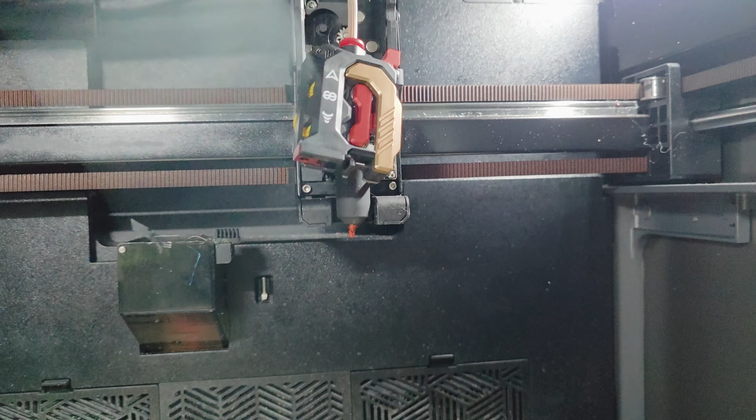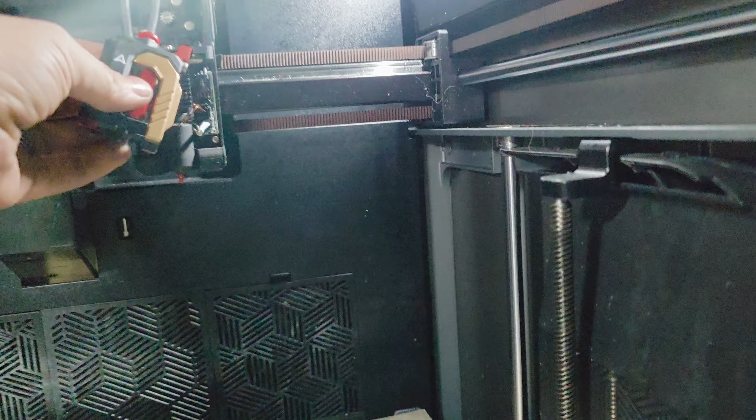We're talking about the DXC2 from Fatius Extruders today. I've had it for about 100 hours now, something like that. So we're going to talk about installation and the features and everything. So we can see here.

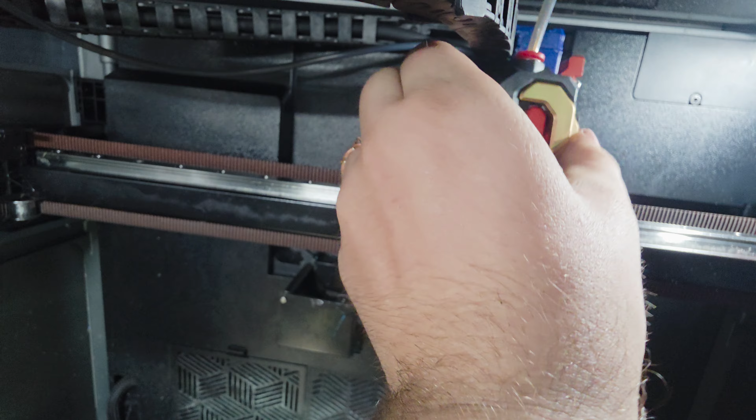So the first thing to notice is, yes, it is magnetic. It does just snap right into place and just clicks in. You can just pull it off just like that. That's the main feature of this.

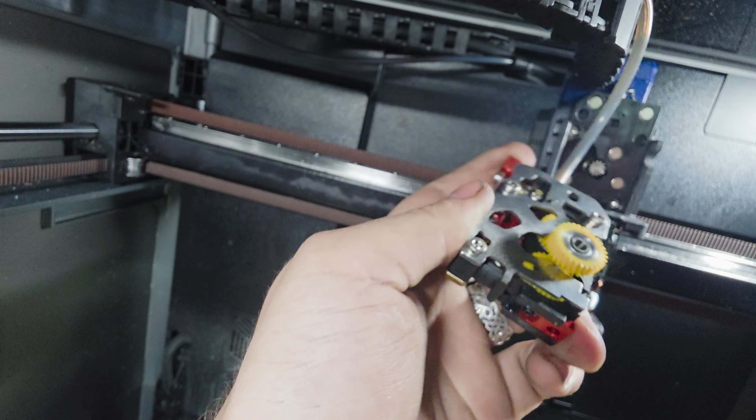It's a lot easier to clean clogs. You can see the filament path and the cutter and everything, and replace it. You don't have to spend 15 minutes taking apart the extruder. I know it doesn't take that long, but you know, to each their own.

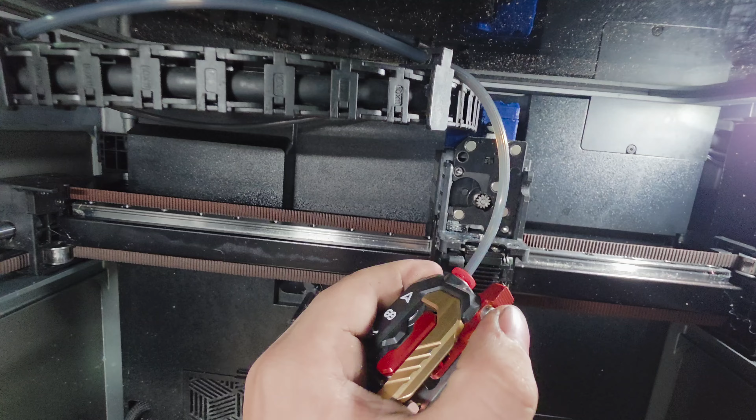One of the other main benefits is now you have an actual tensioning arm, and you can see here, you can see it move.

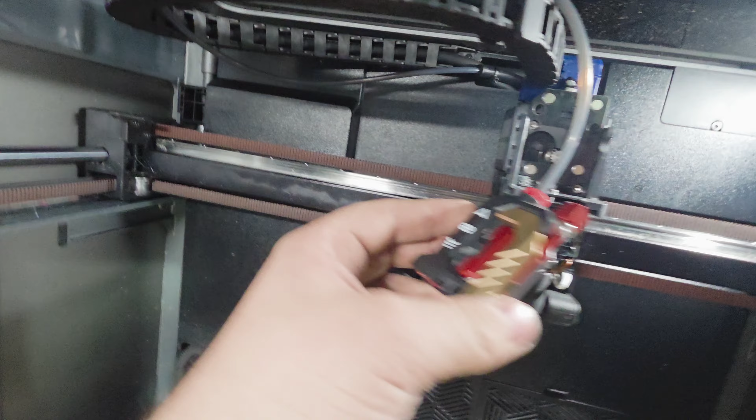So why is this great? This means you can set your tension for multiple extruders, or multiple filaments, I mean. The reason this is great is if you're running TPU, this will run up to, from what I've seen, TPU 70A. I normally run, I believe mine's like 80, something like that. So that gives you an idea of what you're able to run with this.

And you don't have to print any mods for it. It does come with the new riser, which is printed. Of course, this was before I calibrated everything. I do recommend running flow calibrations after you install this. I did a full calibration checking rotation distance, and that came back normal, so I didn't adjust anything there.

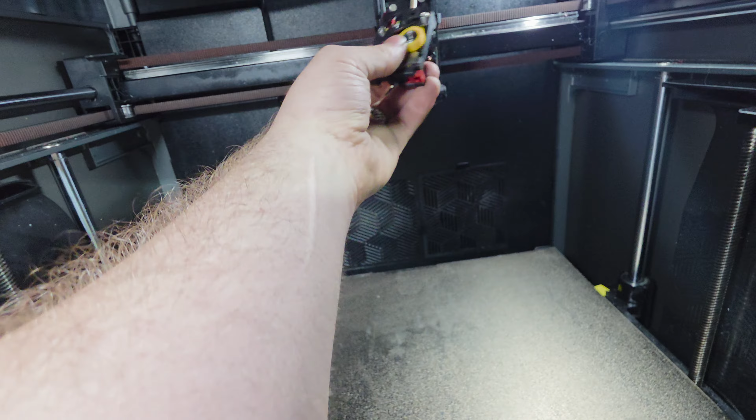But you do also have dual gears here. So you have two gears on the inside that are dual driven, as you can see back here, driven by this piece back here, and that helps keep tension on the filament and makes it better for TPU, so it doesn't clog up and everything.

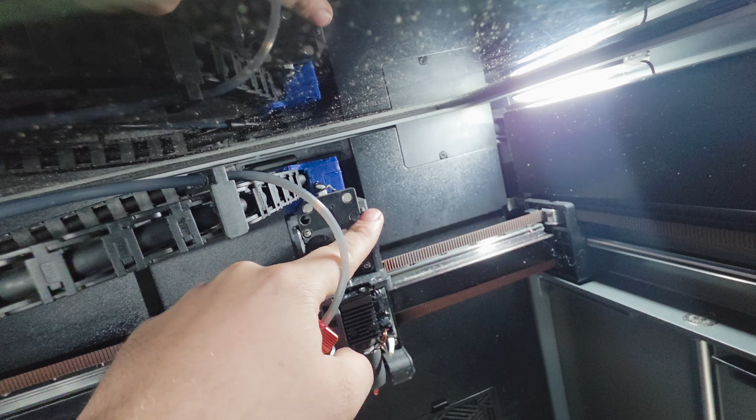Alright, so let's talk about installation. What do I gotta do? So you'll take the original extruder off. You'll remove a screw here, and a screw on this side. You'll pull this panel off.

Now there's bolts here and here that may be on your extruder. My extruder did not have it bolted to the extruder motor, was not bolted to my backing plate. Don't know why that was, don't know if it's supposed to be like that. So you may have bolts here and there. In the supplied kit, you will get these two bolts that are right there.

And you will get your cutter and your self-tapping screw for your mount. Let's go ahead and release the motors on this so I can pull it and you can actually see. We'll pull it forward and lift up, and you can actually see the extruder there.

Now, as you can see, I do not have a riser here. You can see once I clip it in, you can see the bend that I'm getting, and I even trimmed this down a bit.

But after that installation, you'll reinstall the new plate and make sure it's level and everything, and reinstall your cutter sensor and your filament detector on the back side. I don't know if you can see, but the filament detector is right to the back side, and it comes through this little hole here.

How it detects filament is through this little nub here. This little nub clicks right in. I don't know how it reads whether there's filament or not. There is no CFG changes for that. I don't know.

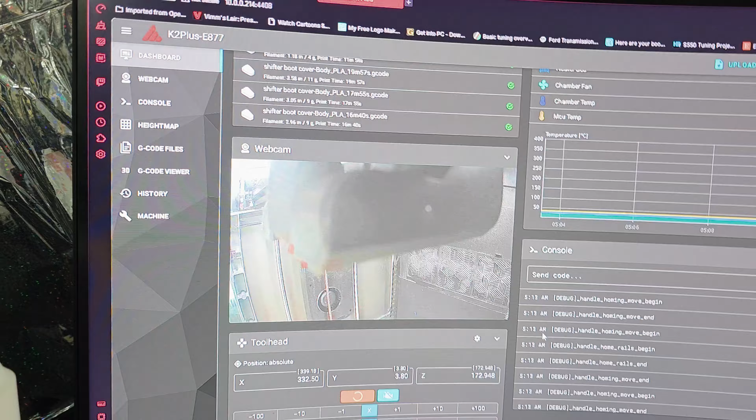But from here, you can check your rotational distance. I know some people don't know how to do it. You use one of these, or just cut off 120 millimeters of filament, and you will extrude using the extruder here. You will set it for 100 millimeters at 5 millimeters a second, and you will extrude that. If your rotational distance is good, you will have 20 millimeters of filament left.

If you do not have 20 millimeters of filament left, you can then go into your printer CFG, and you can scroll down to extruder, and right here you will find your rotational distance, and that changes what you need. You'll need this for a converter, and then you can go.

Don't mind my spelling, I'm kind of... why did I hit caps? I'm tired.

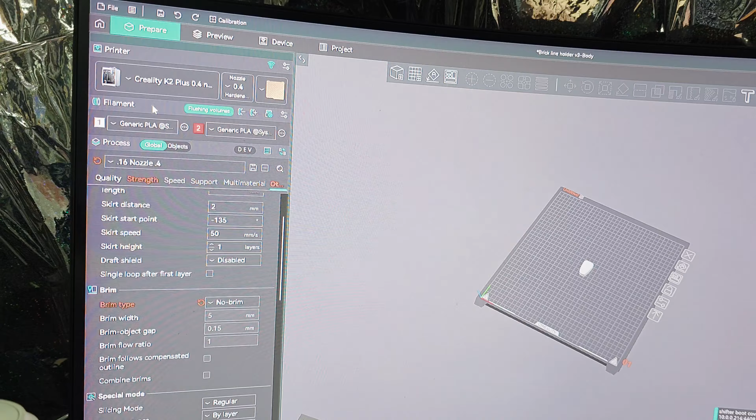Now, once you do the DXC2, you're going to want to recalibrate your filament with your flow and your pressure advance, and you're going to want to dial them back in.

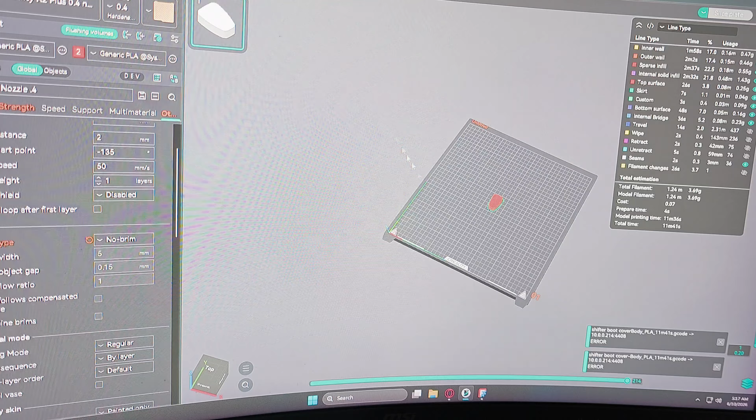You should technically be able to push a faster volumetric speed as long as you're not outrunning the nozzle. Especially with the dual gears, you're not going to slip. But yeah, that is just something that you want to keep in mind.

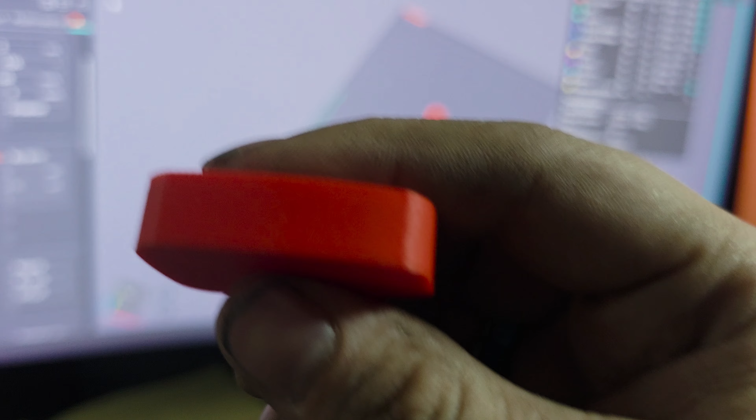Some of the prints I'm getting off of this, this is with no flow calibration. This is just generic PLA that I'm using, and it works really well.

Here's another one that didn't do so well. I'm having a little bit of what looks like under extrusion, so I'm gonna change my nozzle and see if that fixes it.

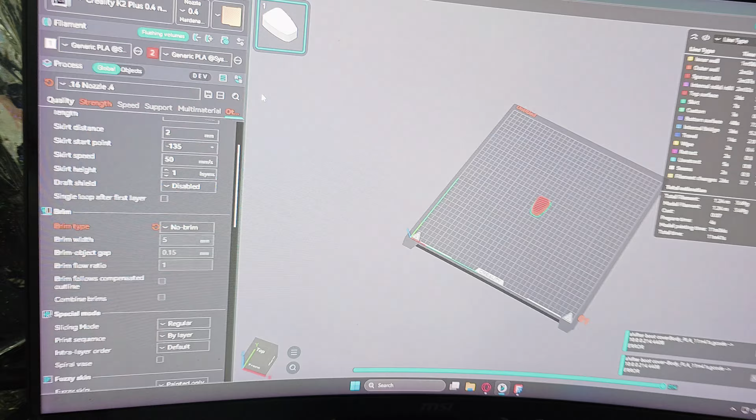But yeah, I am getting a lot more consistent first layer. I am still having some issues, but you know, that is my bed, and as you can see, it is warped to hell.

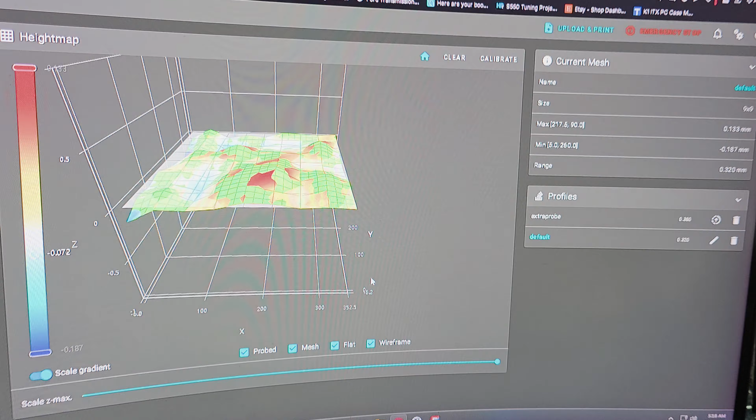But I'm one of the few people that doesn't have an RMA'd bed that has, you know, a 0.3 bed, so I'll take it. So yeah, I recommend it. I haven't had any major issues with it. I will report on it if I have any other issues or if I figure out how to fix them.

A lot of people are having issues with the cutter not cutting correctly on color changes. I haven't had that issue, so take it with a grain of salt.